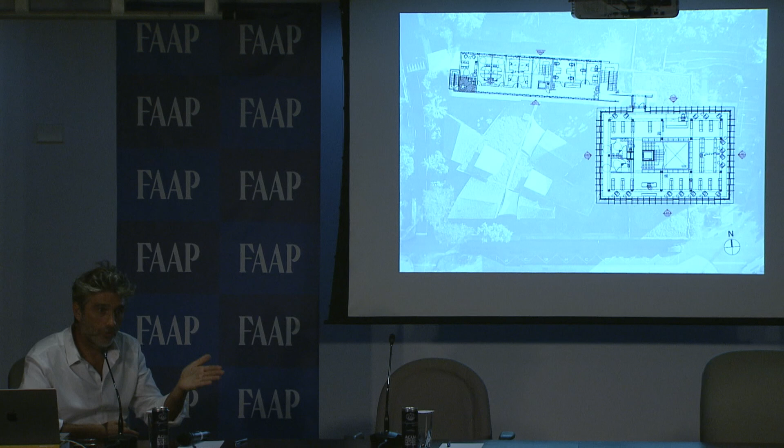So we draw each orientation differently. The brise soleil are different if they are on the east or on the west, on the north and south. And especially, we have a very special plan of the children section, and each red circle is a kind of brise soleil.

So that's the list of all the kinds of brise soleil we've got, because each time we have to balance between solar protection and natural sunlight. So we have to make a special one for each orientation. That's maybe a crazy job, but very interesting, because that was like a catalog after for me.

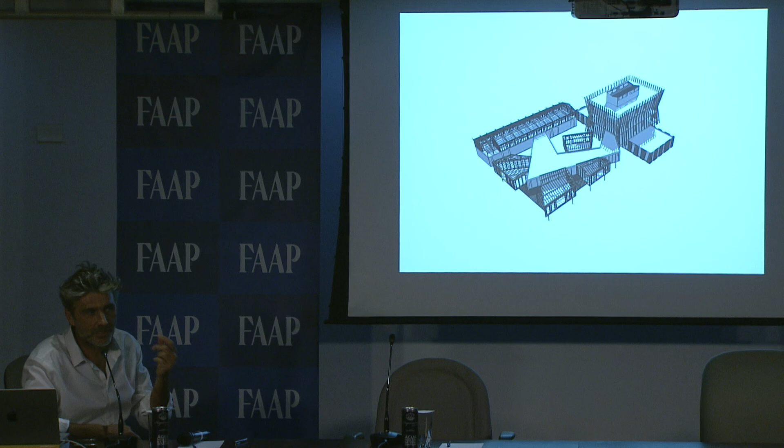Of course, the municipality wanted wood, so we made a base in concrete, and of course we made wood, but taking it away from the soil. It was a way to convince them, because in our tropical area we need some facades without inertia. We try not to have inertia. It's like a reverse way of thinking from what they do in Europe, for example.

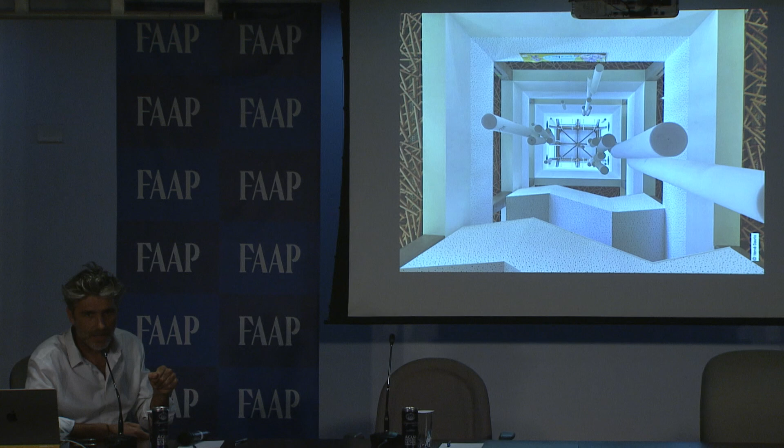So we did it in wood, and after, the big point was the cross ventilation. For narrow buildings, it's easy, it goes, but for bigger buildings, it's more difficult. So we made a negative depression chimney to take the air away, and that's a part of the drawing. I think this system of cross ventilation to extract it is really something very important to draw my and our buildings.

And as Martin told me the other day, French are never happy. And so I said, okay, let's see what's wrong in this building. So I found many things. I won't tell you everything, but I think there was a point about materials. We're living on an island, and it's not so easy to have everything, to have local materials. So I realized that using wood was not enough to be sustainable, and also that making tropical bioclimatic projects was not enough to make a complete architecture.

So I went on, and I had a chance to have another project. It was the headquarters of the Architect Council of Réunion and Mayotte in Saint-Denis. Don't be afraid, it's not the project. That's before the project. They bought a small house like that, and they made a small competition with some architects to make the headquarters.

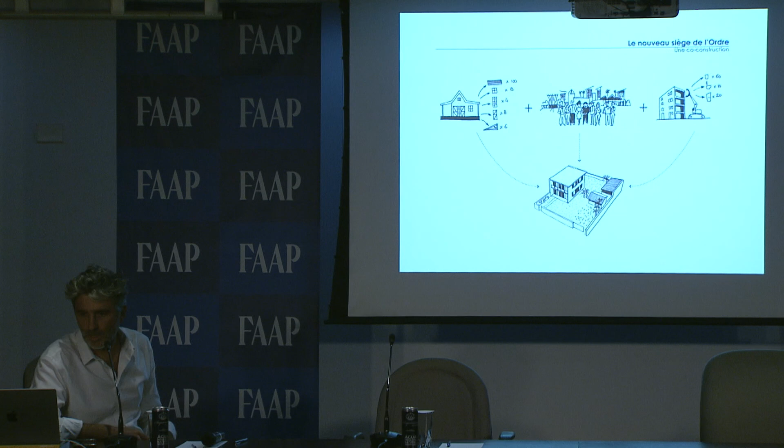And also, there was something very special because it was for the Architect Council. So we had a network, and it was something we could do together, and it could show what we can do in our world. So putting that all together, I said, okay, why don't we reuse materials to build this building? And we presented some plans with all we do.

I always tell you that I start with the landscape, with the soil, what happens. That's like a basis. Because something changed. I decided after the media library to put bioclimatic things at the beginning of each project. It was not just an objective to reach. It was like a basis, like gravity, something we have to start with. And after, we can add all the complexity and the richness of architecture and our cultural environment.

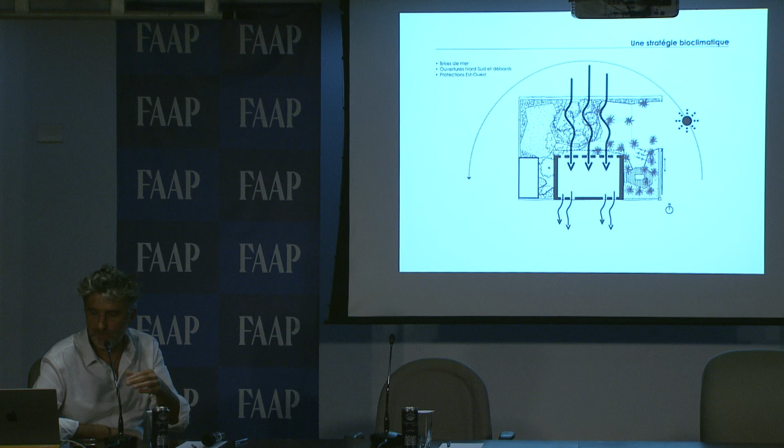So we did this landscape. We put some plans. Of course, we had a bioclimatic strategy. That was obvious. It was pretty easy here. And after, I told them the project can be that or that. I don't know. We'll see what we'll find.

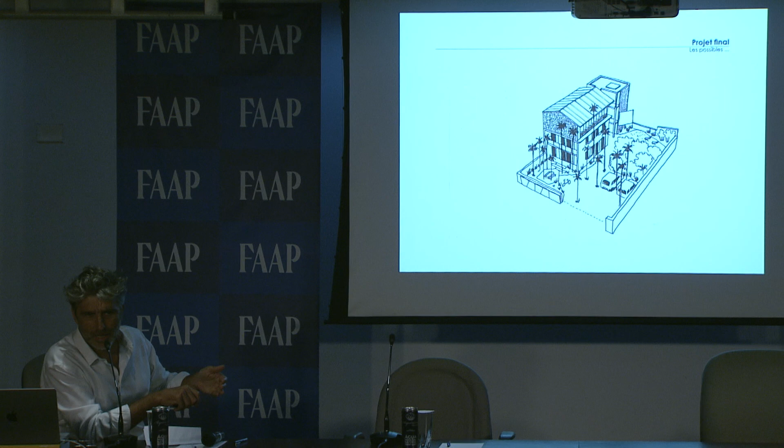And they had a big debate inside, because some of the people said, okay, it's wonderful, we have to prove things. And other people said, you're crazy, we will sign with him, but we don't know what the building will look like. And some people said, okay, it's a council of architects, we have a strong image, and how will you do with that?

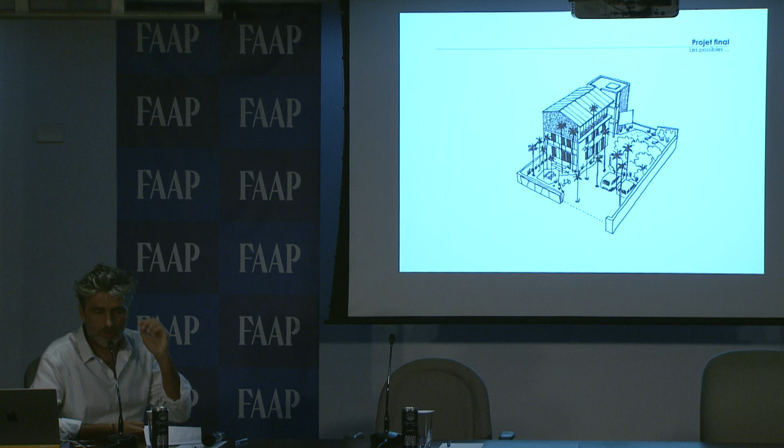So finally we won. And we started to look for some materials, a field. That's the most important when you reuse things. So we spent nearly 1 year.

We asked all the architects: if you have got some things in your works, if you destroy a project, call us. So someone was calling: okay, I've got two windows there. Okay, send me a picture. We spent nearly one year going all over the island. It seems small, but sometimes it takes us 3 or 4 hours to go from one side to the other. So it's not so easy.

For example, we took the windows of a kind of hotel at the volcano. We took them, and afterwards we put them in the facade. So we changed our mindset completely. We don't design and then find material; we've got the material, and then we design with the material. So the lines and the drawing of this facade are done by the materials we've found.

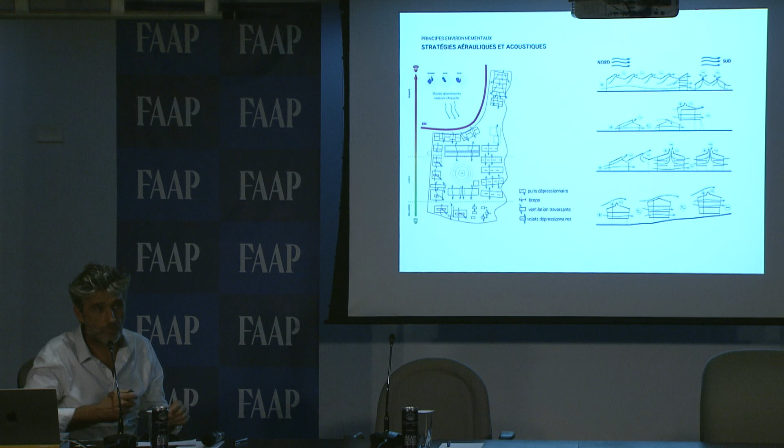So we have to think not only about the cross ventilation of each building, we also have to think of it at a large scale. If you make a building which blocks the wind behind it, it doesn't work. So we have to think about all that, and every program makes a different drawing, because this is a place that we call it an écope, or that's for the classroom with an umbrella roof, different,

and we tried it in what we say in French a soufflerie. It's a wind tunnel. We made this huge model to test, and there are a lot of sensors inside, so we improve it. The model is 4 meters by 2 meters, and we can see if there is wind in each room, and we can also see the movement of the wind to improve it and to change it. That's the Laboratoire Eiffel. We did that in Paris.

So that's this project. It's 20,000 meters, but a lot of wood. Don't worry. It's also talking about earth, and that's the pathway, the walkway around with the existing chimney. But this project is also human, and the most important thing I will speak about in this lecture is more a human adventure.

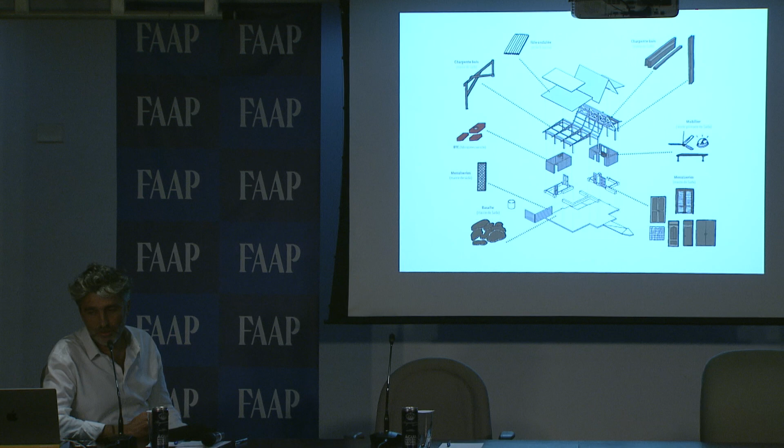And we started the works there, always with students or children coming, because it's an existing high school. So it was a support, we can say, because the students came here to work, to see how we really build it, and they helped us to make the building. And we mixed it with CEB, because that was one of the topics. So the two architects who were there stayed working on CEB, and after they made many things.

The aim was to communicate about this project also, because very often the project is completely abstract, and suddenly you open the present, and there is a high school, there is an airport, it's completely finished. We wanted to change that also in the process, in the way of thinking and sharing the project.

So the first thing we did, of course, is a big model, because that's a very important point to communicate a wood project. I think the model is a perfect way to communicate it, because everybody loves models, and it's very easy. So we made a big model, and as it was an existing high school, we asked them to buy some CEB presses, and we taught the teachers how to do that. It's very strange, because we were not architects. We were like teachers. Our aim was to have a positive attitude on the territory.

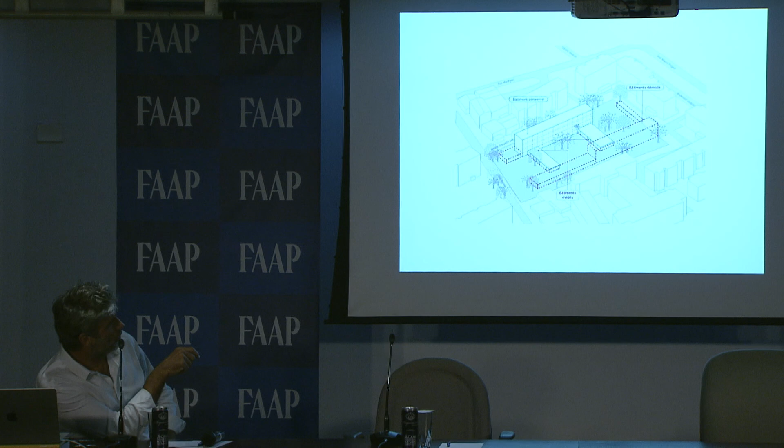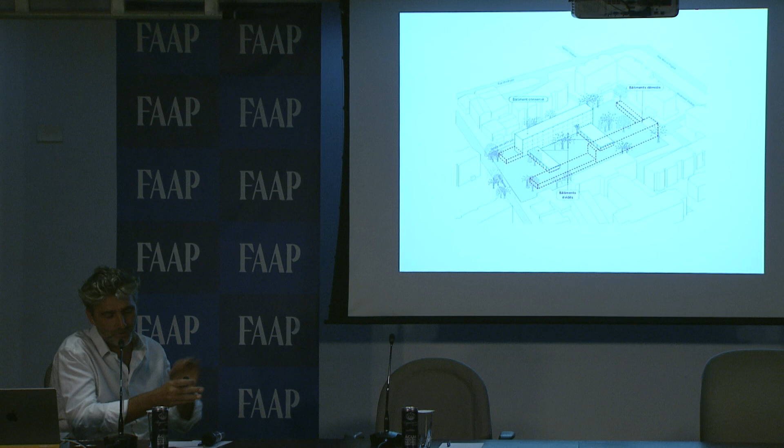So we said we will destroy all the red ones, but we kept just this one. This one and this one are not very interesting. There's nothing. But here, we said we were destroying it because there was some problem of wind. But you'll see, we built the new building exactly in the same way. So it was just a strategic way, not to say that we are keeping everything. We will come back to keeping them. So that was the first point.

We had to change the image because there were really reasons. We wanted to understand why they wanted to destroy it. There were political reasons because they had to show something happens there. So we wanted to make a horizontal and vertical fragmentation, to change the edge of this building also. And after, the main thing we did was we planted a forest.

Because it was a very strange project. Usually there is not enough space; here we had too much space. I wanted to go very fast, but there is a system: there is a public space, and the school is taking all the site when it's open, and when it's closed, it becomes public space. So there is a kind of mutualization of the spaces.

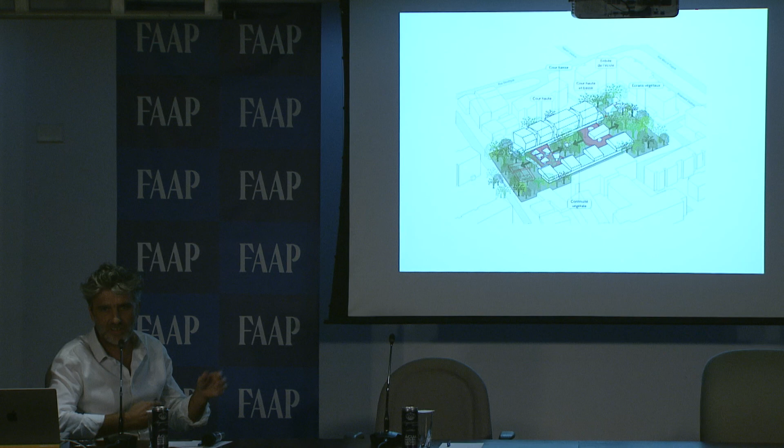But the main thing is to start a project not speaking about architecture, but speaking about landscape. And as we had a lot of space, we started to ask what will happen in our landscape. It's not only putting some trees. How can we live outside? What will the children do? So we started to say, okay, here this will happen, there that will happen, and like that you could design outside.

With it, we were not speaking about hard architecture, but it's very important, especially in our tropical places. Again, it was a way to say what's happening. These small sketches just mean that there is a huge attention about that. And after, we translate it into architecture, but it comes after.

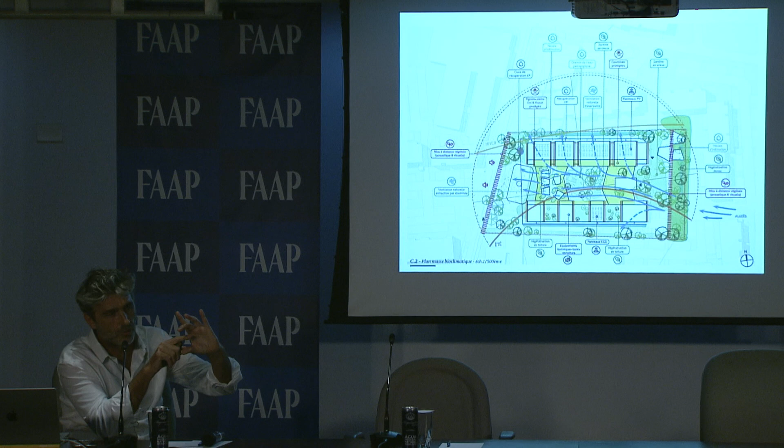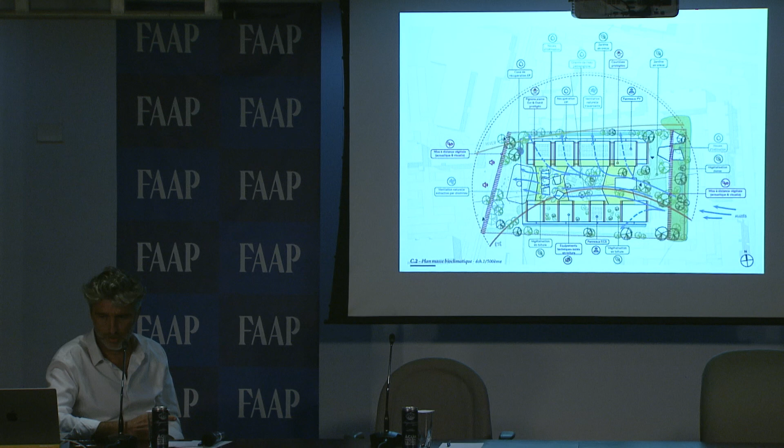Of course, it's a sustainable project, and there is very important technical work to make cross ventilation, because it was not so easy, because the wind was coming here. It's much easier when you've got a new project, of course. But we took the strategy of a U. You make a pressure: the wind is coming on that side, there is a positive pressure here and a negative pressure around, so it creates wind into the classroom especially.

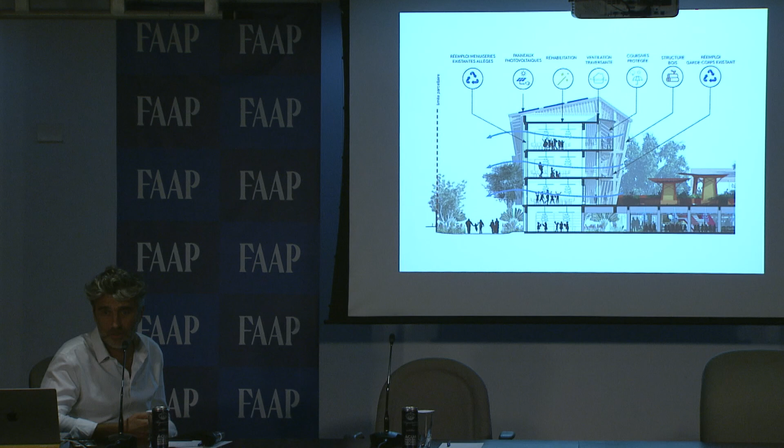We also see cross ventilation. I was speaking to you about it, and here it was more difficult, so we made some chimneys to help in the restaurant area. I think we spoke a lot about it during the workshop. Using wood, adding it to other materials, is very important also. We have to think about it because it's very light and it can help. It also helps to protect, to give more insulation, because all the question of this project is solar protection, wind, and landscaping.

And we were very lucky, because keeping the original structure allowed us to have more space. So we could increase the spaces of the classroom by doing this varangue. A varangue is these rooms which are not inside and not outside either, but protected from the sun. So I hope the children will be as happy as in Japan.

And I want to finish with something else. I will present you something special. It's a project we haven't done yet. We're just starting to draw it, the first sketches, but it's about a story that happened in Mayotte on December 14th. A big cyclone happened there. December 14th was a Saturday, at 10 o'clock. A cyclone arrived, and it was really a very important one.

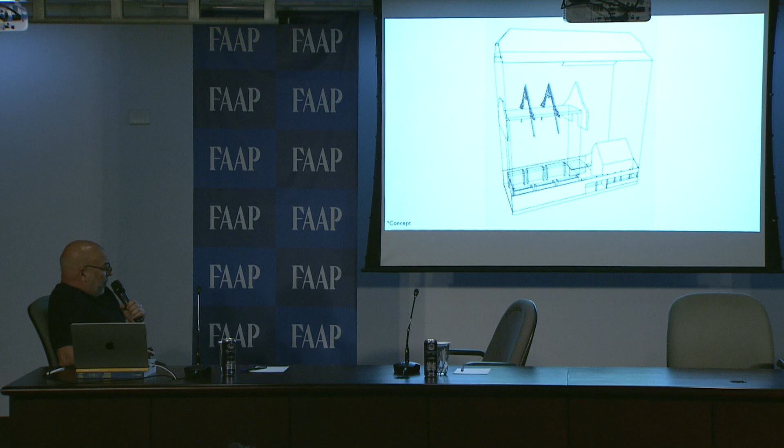And just to show you one of our early works that deals a lot with tradition, with the craftsman tradition in Vorarlberg, but in a very contemporary way. This is a small museum in an old, 400-year-old farmhouse in a typical village in the mountains, a listed building where there was a little museum up front, and we were hired to do a museum for Baroque painters from the 17th and the early 18th century, and we did this. We inserted a house in the barn, and our goal was to hide this more or less. So that's the building, very typical, one of the nicest examples there. And when the museum is closed, you don't see anything about the operation. When it opens up in the morning, it becomes clear that this is a new place.

It's done in silver fir. We have heard in the last days that you have hundreds of times more species than we have. This is one of our most precious, the silver fir. Wonderful quality of timber. Unfortunately, it's more or less gone in our area now. That's also something that we are not very proud of, that we were part of exploiting this kind of timber, and it will take a long time to recover. And right now there are just parts in the Black Forest in Germany where that kind of timber grows in larger amounts.

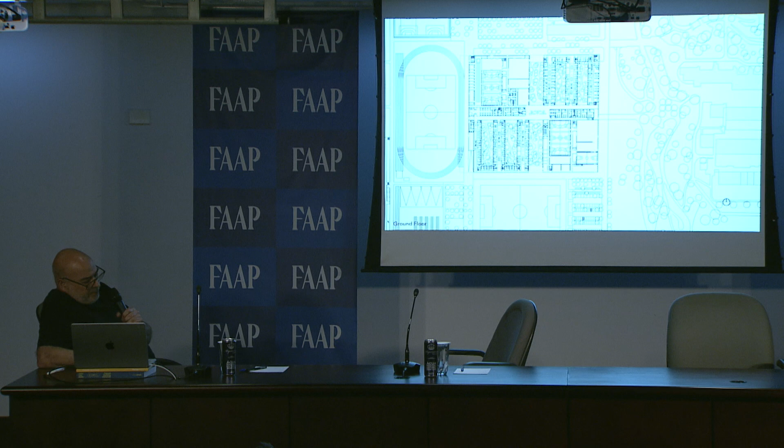You see here the gym halls, the institutes. To the left we have the restaurant and the library. Six courtyards in between. You arrive at the upper level, and down here on the lower level there are all the dressing rooms, stuff like that, and 20 hectares of outdoor sport facilities.

And one of our images was that, blue, yellow, red. It shows the different parts. So blue are the sports halls, red is the big canopy that you might have seen in the model. And yellow is the so-called rue intérieure, so the main gathering spot, a large distribution zone for students, which is dedicated for every purpose. So it's not just walking around without any furniture, but it's a full event room.

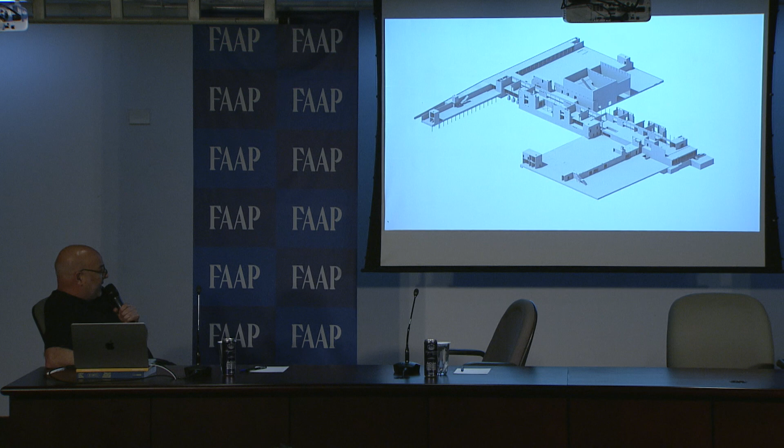Also in an almost full timber building, you have a lot of concrete elements. Here we had the problem that this dimension, 200 by 160, is for the horizontal forces, for such a low building, quite a challenge. So we decided, together with Konrad Merz, the structural engineer, that we do this rue intérieure mainly in concrete, the auditoriums, and of course all the vertical staircases, and the rest then in timber.

The most important element is that canopy. In the competition, a canopy with 28 meter span. We had to reduce that later to 20, but not out of structural reasons, just the budget was not big enough to allow these 28 meter spans. So these are elements 32 meters long, 4.50 meters wide and 2 meters high. They sit, to the left, on these two pressure steel columns, and are held back with these 7 centimeter tension poles.

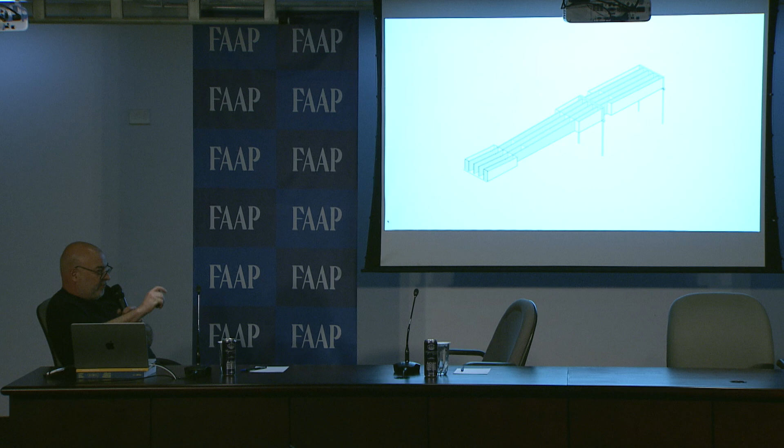So a little bit the opposite of the '72 Olympic structures. Here the element itself appears quite strong, but it sits on almost nothing, and just the weight of the ground floor holds it back. So these are the craftsmen within one of these elements, fixing it in Austria at the enterprise, then brought it.

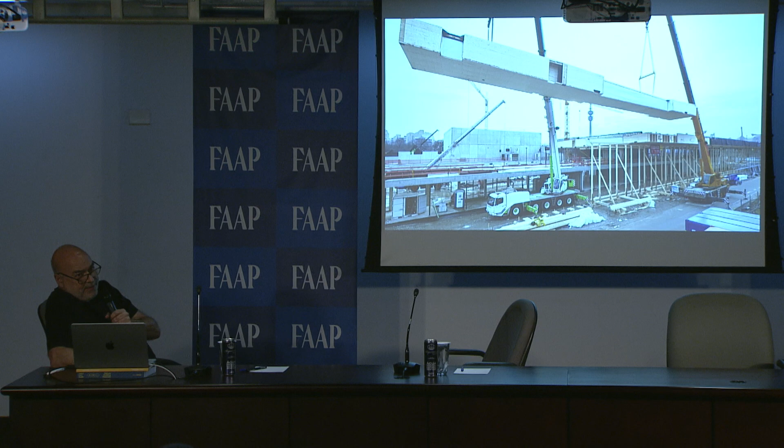That was a transportation, 24 elements, about the size of half of a windmill wing, and they put these into place within, I think, 3.5 days. 4,000 square meters of prefabricated elements with 2 large mobile cranes. You see here the tension poles and the pressure poles, so really more or less nothing.

And then there was a supporting structure for 3 months that you might have seen before here, and that was the first moment that I saw even Konrad Merz, the structural engineer, a little bit nervous before they pulled out the structure, but it did exactly what he intended. It came down 2 centimeters, and it still rests. That's the advantage in timber, that it doesn't have such a big long-term, I don't get the word now, but if this were a concrete canopy, over time it would come down a little bit.

The purpose for this is, on one side it was a sign for this important building, but we also wanted to create, like in Formula One, a pit street, because a lot of Olympic champions train there, and below the terrace are laboratories, and they put their equipment out and do exercises on all the sports people outside. So it's very convenient because they don't get wet because of that roof. It's a very important part actually in the ongoing processes.

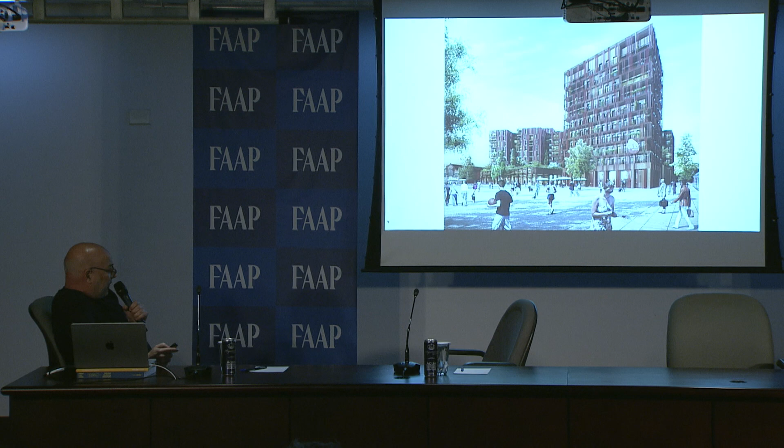First we wanted to do the hotel in 3D modules, but they didn't have the ability. It was a carpenter from the Pyrenees, and they couldn't produce these room elements, so we decided at the end to do the whole operation in 2D prefabricated timber elements. So that's it now. So that massive base for the commercials, and on top the up to 11-story high building. The little park on the supermarket.

We have chosen different reds because Toulouse is known as the Rose City because most of the buildings are done in brick. These are terracotta facade elements. So it's almost itself a little quartier. And terracotta poles for the tower.

And then a very important project that maybe works quite well with the topic of the systems. The renovation and extension of a lycée close to Paris for more than 2,000 students. A typical school building from the 70s like that. There are in Paris, I think 700 or 800 and a few thousand in the whole country. Quite poor architecture, very bad energy performance, mostly done in concrete with just maybe 3 centimeters of insulation.

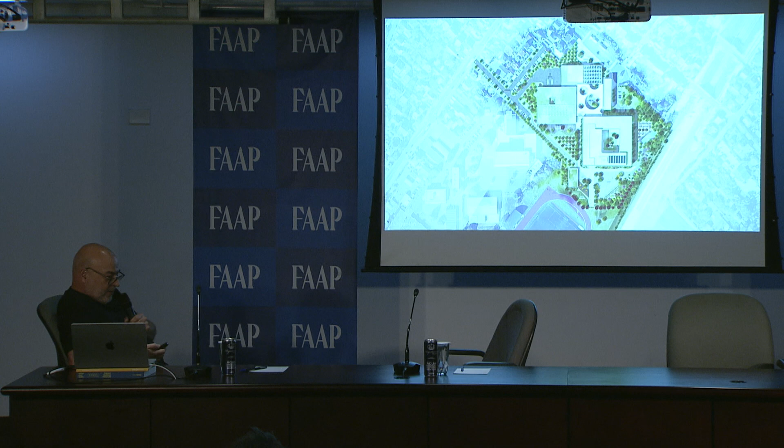And then we decided also that this part of the existing school building was 5-story, but the new rules didn't allow a 5th floor anymore. So we wanted to keep this, whereas we also wanted to create a central courtyard space, which I show shortly after. The big goal was how to do that without ever having some of the students moved out. So under full function, within 6 phases, we developed a system so that we could avoid temporary buildings, which would have cost millions for nothing.

And because we left everything there and just added these timber structures, which are very simple, almost each phase just runs for the summer holidays, and this enabled us to have completely no temporary buildings. These were images from the competition, the new entrance building, the new central exterior courtyard, the new main entrance in the back, the extension of the restaurant as a timber structure. All of that ongoing. In the back you see the city of Paris, the Eiffel Tower.

If you look quite closely, you see here to the left that wing that closes the school building, the extension of the restaurant in the foreground. Very simple structure. Unfortunately, the client, after we had a battle for years for the budget and were completely in the budget, then decided they wanted to go for a general contractor, and the next day we had 30% more costs for, I would say, not very realistic security in planning and in budget, because these companies try from the first day to make more money out of their contract.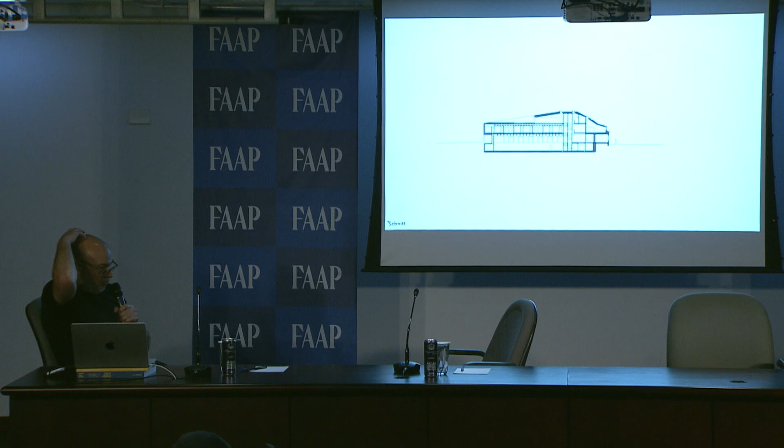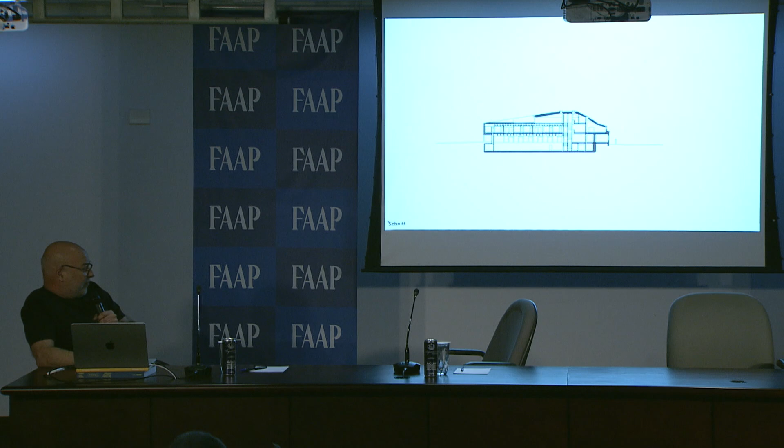We've taken from the excavation of the sports halls the earth, produced prefabricated elements for the walls that we fixed on these grass mats. That's when we mounted them, and after that we plastered them with earth 3 more centimeters, and that's a perfect solution for the air conditions in the building, because it takes a lot and gives back a lot of humidity. So from above, you see that big head.

The whole glass body is shown as part of the roof. This is one of the hallways with the windows, which also works as outdoor teaching. At the end, you can go down to the courtyard. This is this series of connections between the classrooms.

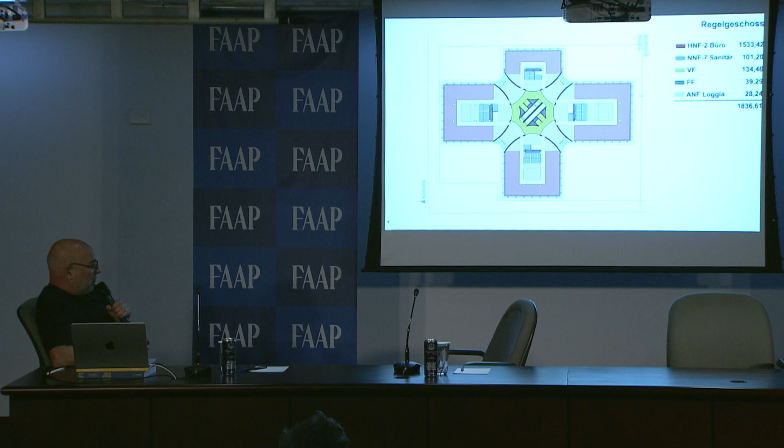We are in challenging times where I think the numbers we are used to taking into account for new timber buildings, or even for buildings, will change into a complete CO2 measurement. And these office houses we do for the owners of Lego, the toy company, who want to have the Danish numbers; they have a limit of 8 kilograms CO2 per square meter. They wanted to do their Danish numbers here in Switzerland. And so we designed at a very early stage, so that the complete project, even before we gave it to the authorities, was completely detailed.

This central part is in concrete, and the office wings are 100% timber. And we found out some very interesting things about the CO2 footprint, because we checked different kinds of structural elements, how many kilos they use. So for example, a hybrid system and a 100% timber structure just have about half a kilo difference, and a 100% concrete structure has about a kilo 20 difference. So if you take into account that in total it's 8 kilos, you see that you have completely other problems too that you have to take care of, not just the main structural material.

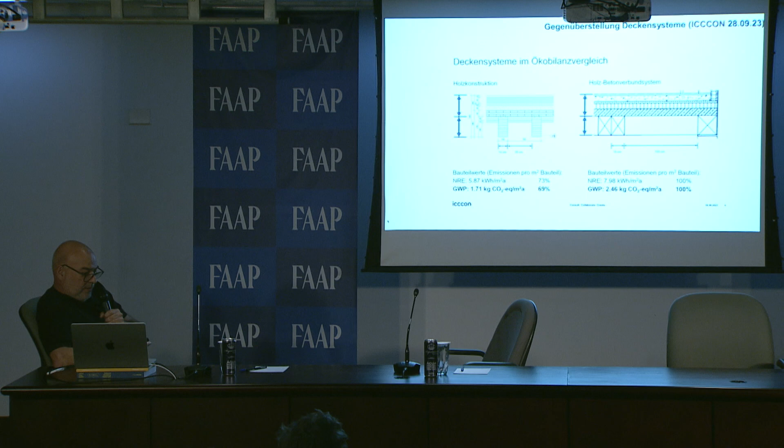So we did all these lists. What are the advantages, disadvantages? And the result was we do it like this now, 100% timber here. That concrete, I always call it the concrete floor, which is not that bad, because here we said we just do the concrete floors. There's no additional layer. And compared to the timber floors with a lot of additional layers, the footprint is not much worse, actually. So this is under construction now.

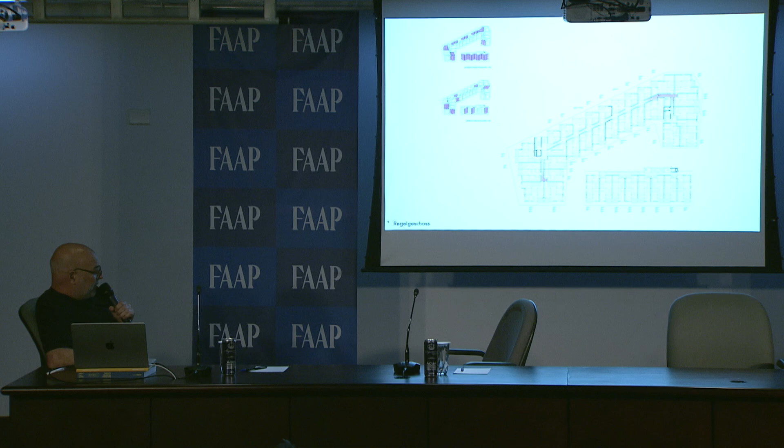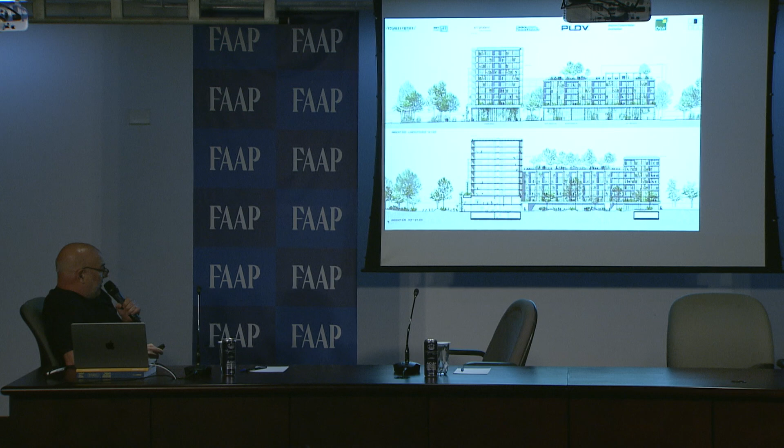And just to finish, some social housing. We do a lot of social housing, also in timber. So this one with an 11-story tower. Here we have the strategy that we do the floors in very thin concrete prefabricated elements, 3 by 3 meters. Then we have thick timber columns and a timber facade. This is price-wise actually very good, because of course for social housing the price is a topic. Even that quite differentiated, complicated geometry works. That's the model 1-to-1.

A mobile kindergarten that is completely done in prefabricated 3D modules. You erect it within 2 days. You could take it apart any day and put it up somewhere else. 3 elements is always 1 classroom. So a very cheap and practical solution for temporary buildings, whereas mostly they last forever. Nobody takes them away. So everything is already installed, all the pipes and everything.

And then just quickly I pull through a housing system with 12 by 12 big units that can work 2-story up to 4-story, and also in a closed plot within cities. A project where the Secretario yesterday said something about all the waste we put into landfill. Here we use 12,000 pairs of skis that were thrown away as railings for the apartments, because of course there are a lot of products you can reuse or give a new meaning. These skis will never rot, and they are completely weather and waterproof. So why should you throw them away? And these 12,000 pairs you have each year as garbage out of the rental ski market.

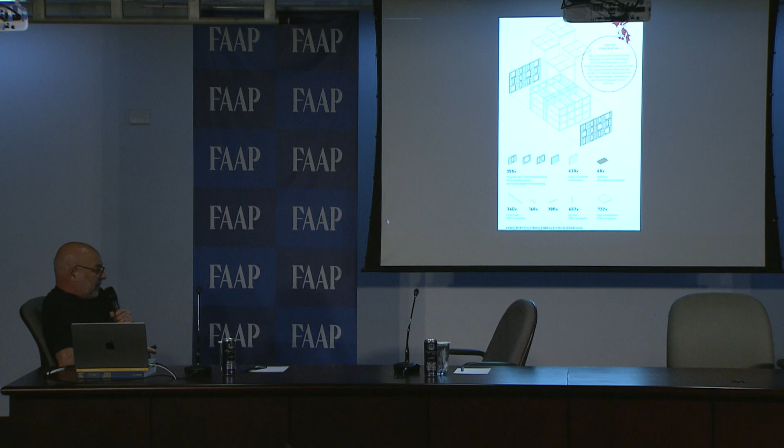Yeah, what's the future of building with timber? It's late, maybe it's too late, but still the forest is growing. It's still there. It's growing. If it goes well, we'll have a lot of timber buildings that educate us and our children, and store a lot of CO2. So maybe we still have a chance, and hopefully stupid assholes like Trump or Bolsonaro or complete dumb megalomaniacs like Musk or Dr. No, to come back to James Bond, will not take everything over. Thank you.

It's going late. You have my presentation loaded? Yeah, but let's see where. Oh, I downloaded it, right? See if it's one of these. What's the name of the presentation? Not this one. It's Núcleo de Madeira, and then my name at the end, I think. You want to copy it again? No, I have it here. PPTX, Núcleo de Madeira. Maybe I put the date first. Yeah, maybe. We do it back now or?

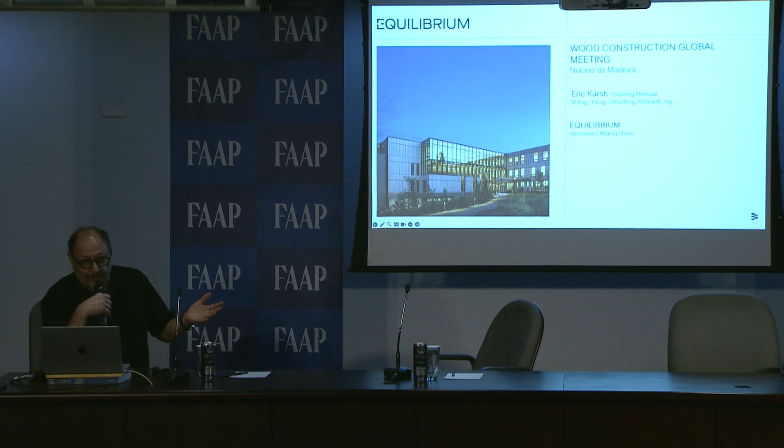So we founded Equilibrium in Vancouver in 1998, and then more recently in Paris and Atlanta about 3 years ago. We are about 25 people in total in 3 offices, so we're a very small firm, I would say, but we do all kinds of projects, and about 90% of them are in wood. But we also design the concrete and the steel that is in our structures ourselves. And for those who come from France, we work both as engineers of record and as specialty engineers, so working for suppliers. And we always prefer to do both on our projects.

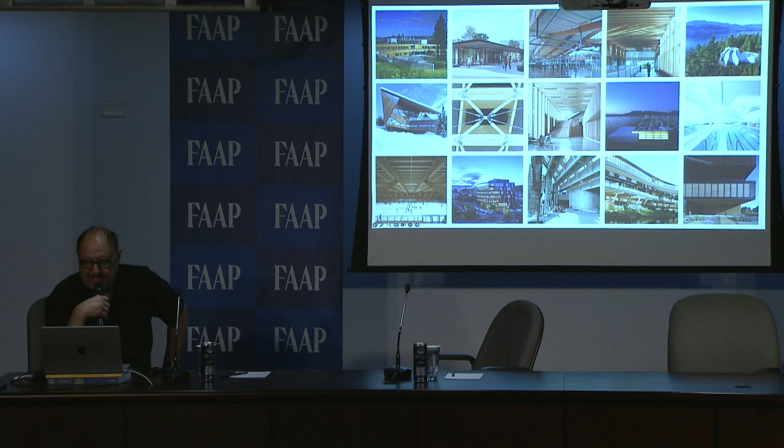So we do First Nations projects, as I said. We've done over 100 of those. We do schools, we do university buildings, airports, small projects like this yoga pavilion on the right-hand side, which I will talk about a little bit, sports facilities, multi-residential, office, and so on.

In 1998, when we started the firm, timber technology in North America was, I would call it, very primitive. It was steel plates, bolts. There were 300 CNC machines in Switzerland at the time, but none in Canada. We got our first CNC machine in Canada in 2001, which completely changed how we design structures because it shifts the economy of labor and materials, because the CNCs, of course, can work very fast and do very, very complex cuts, but also do them very accurately. So this opened the door to using more sophisticated connection systems.

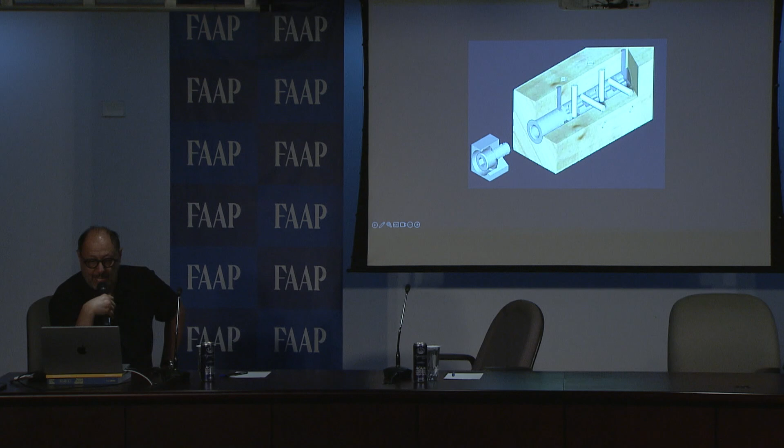CNC technology also allowed us to do very complex structures. This is the Art Gallery of Ontario in Toronto, which was designed by Frank Gehry. And if you look closely at this facade, you will see that the timber elements are at a slightly different angle. They fan from left to right. So every single connection in this structure is geometrically slightly different.

So we used CNC manufacturing to keep the steel connectors the same, but to vary the geometry of the wood, to unify the connection systems as much as possible and bring the project on budget. And I love to show this picture here where people go to an art gallery and look at the structure instead of looking at the artwork.

In 2007, we were invited by a group of Austrian investors who wanted to build the Austria House in Whistler for the Whistler Olympics. And we discovered the passive house concept there, but also CLT, which we didn't know about before that. So we came back very excited about this new construction method and convinced an architect who wanted to build his own custom home to build it in CLT.

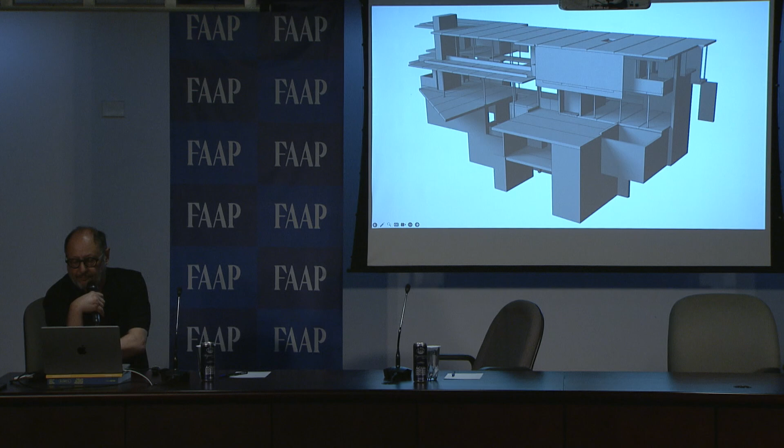It ended up being the first CLT project in North America. We designed it in 2007, but it was built in 2009. And this house actually was delivered from Austria by KLH in containers. And the entire timber structure was built in only 5 days. So there's a view of the house here, and then there's a view of the completed project.

But every project in Canada at that time could not be built with CLT from Austria, so we looked for other panel products to do some other mass timber projects. This is a renovation. It is the North Vancouver Civic Center where I live. So on the left-hand side, you have the original Civic Center. On the right-hand side, the original library. They built a new library, and then they connected the two buildings together to make a larger city hall.

And the connection between the two buildings was a tube that was built from glulam and mass timber panels. These mass timber panels were made of what we call timber strand. So it's a little bit like OSB, but it's very thick, 9 centimeters thick, and it's made of panels that are 8 feet by 64 feet long.

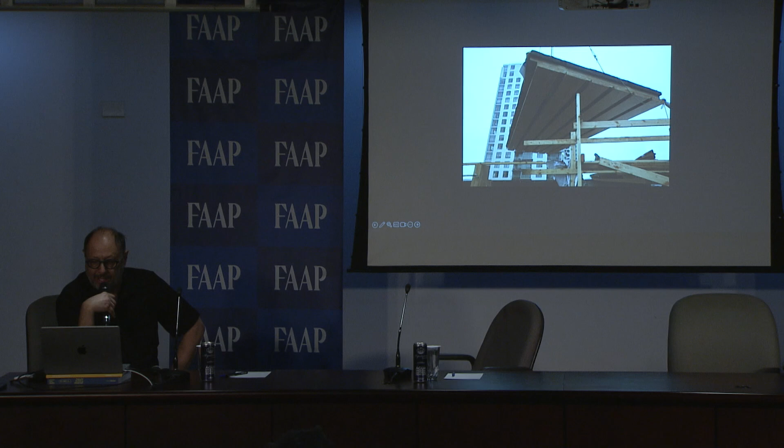So we have 4 layers of this material, basically building a custom-made hollow CLT panel, which was prefabricated in the factory, connected together with screws, and then shipped to site in 12-foot wide by 32-foot long panels. So, roughly 4 meters by 10-meter panels. Now this material is quite industrial looking, but when you sand it and you build it at a very large scale, it actually has a very nice appearance, a very nice texture.

And you see here that connecting central space from the inside with the glulam columns and the prefabricated panel on the roof. The architect, Michael Green, also used the same material, but in a much thinner format as a ceiling in the original concrete building, in the original library.

And the black timber that you see here on the guardrail was actually made from a tree that was in the central space that we had to remove to build the connector. So the wood was all milled and used in the finishing of the guardrail.

This project, you may have seen, was a very pivotal project for us from a technology development point of view. This is in 2009. We're at a time where the BC government was investing significantly to help develop the use of timber in the country. And this university project, the Earth Sciences, was chosen as a demonstration project to show that timber technology had become a high-tech technology and that timber could be used in almost any project.

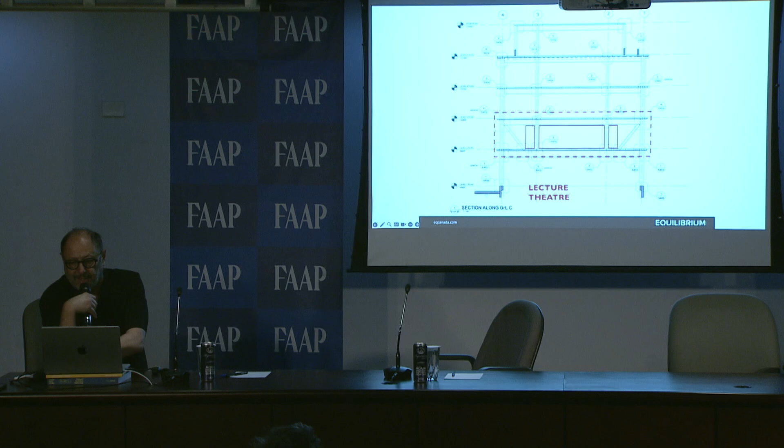So the solution was to use a steel concrete composite bottom chord, mainly because the diagonal doesn't actually meet the column. So to take the shear there, we had to go steel, but the top chord is made up of glulam concrete composite, and then you just have a steel diagonal.

And that 21-meter truss, when the scaffolding was removed, only moved 10 millimeters or 1 centimeter. We like to keep our connection details simple. You can imagine this is a very, very high load that is coming out of this diagonal, but timber is very, very strong in compression parallel to grain. So you bring the load from the diagonal directly into the end grain of the column and the top chord to achieve a very efficient connection.

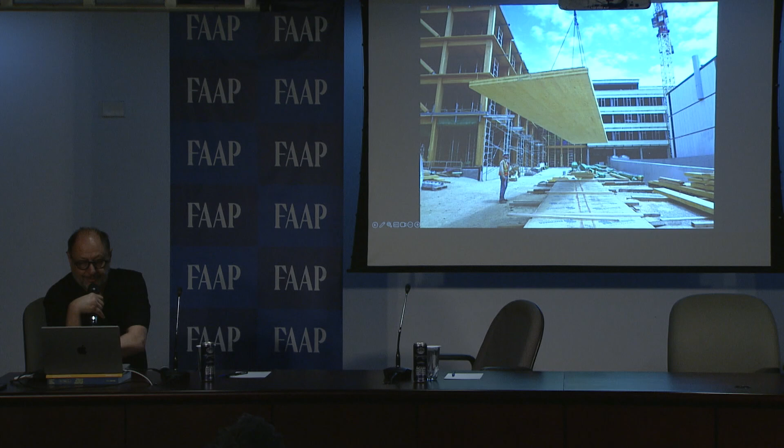The CLT was produced just in time to deliver the roof panels. So what you see here are the first CLT panels produced in Canada, I think. There were a handful of panels that were produced before that for testing, but these are the first commercially sold panels, which we chose to cover with a membrane in this case because we get a lot of rain in Vancouver. And there were other innovative elements in this project. This is the canopy, which was also built out of CLT.

But the most innovative or technologically challenging element in the project was what we call the flying stair. It's a cantilevered stair, which is only attached to the floors. It is not suspended from the roof. It is not connected to the side column there. It's completely cantilevered. It's very easy to do in steel and concrete, but as far as I know, had never been done in wood. So again, we worked with a European connection system called the HSK system. It's essentially a perforated steel plate which is glued into the wood, creating a very rigid connection.

You see here the landing of the stair, which was glued into the wood panel in the shop and is being flown into place to be connected with the stair runs. And then you see the holes here where the glue is going to be injected on site to complete the connection. So there's a view of our completed structure.

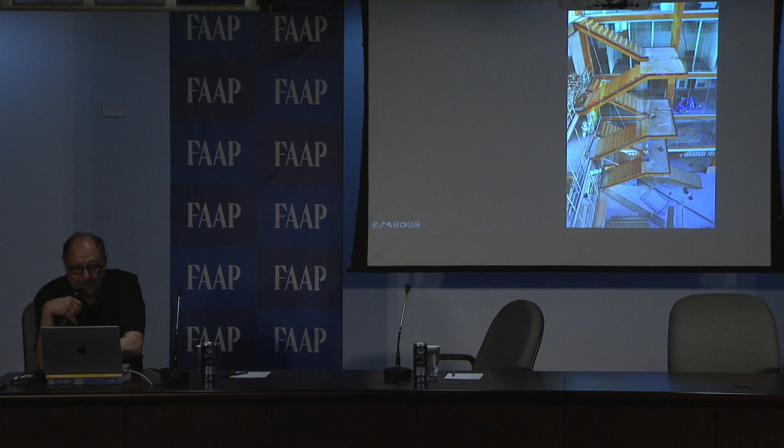5 stories tall. I honestly didn't think that people would use this stair. I thought they would be scared to use it. But if you stand at the top of the stair looking down at this timber stair, it was quite frankly scary. But I asked some students what they thought of this stair, and none of them seemed to be concerned about it at all. So there's a view of the stair with all the finishes. You see a line of sprinklers, lighting, and of course the glass guardrails and the floor finishes.

So this was one example of a project that was chosen for demonstration and technical innovation, but we did a few of those at the time. So this brought us to the point where we thought we could be looking at building larger or even taller wood buildings. And again, with Michael Green, we got a small grant to do a feasibility study called The Case for Tall Wood, and you might have seen his TED Talk where he talks about the report.

We started with the idea that we would do a concept for a 12-story building, but then Michael went to Japan and he saw the Japanese temple that is about the same height, but almost 1,000 years old. So he came back and he said, well, they did it in Japan 1,000 years ago, so we're just going to have to go taller. Now, this is the architect, right? The architect doesn't mind going taller because the engineer is going to figure it out, and that was my job. We decided to go 20 stories.

So we developed the concept and we analyzed it, and it was actually working quite well. So I told Michael, you know, this is working really, really well. Don't tell anybody, but I think we can go taller. We can go 30 stories. So he goes to a conference in Australia, and he tells a Canadian journalist that we can go 30 stories. And the next day, in the papers, there was an announcement that Michael Green was building a 30-story tower made out of wood. So the report all of a sudden became 30 stories, and it was published that way.

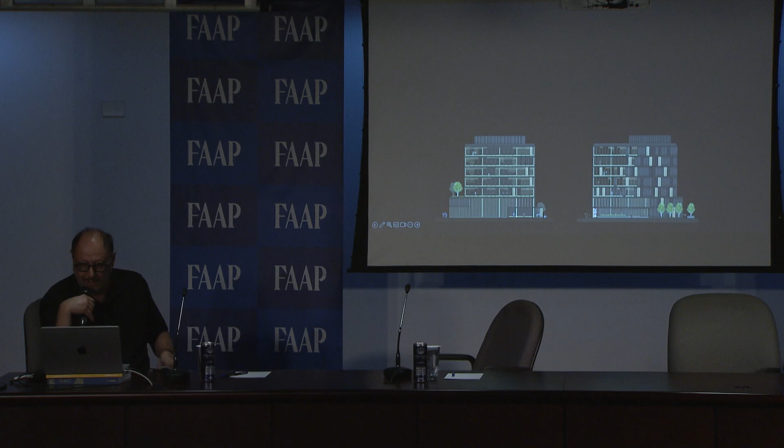And this actually received a site-specific approval because we were completely outside of the Canadian code at the time, both in terms of height, but also because we were exposing absolutely all the wood, including the stair, which you will see later, which is made out of wood. And because we were planning to expose absolutely everything, we needed a pretty sophisticated strategy to hide all the services.

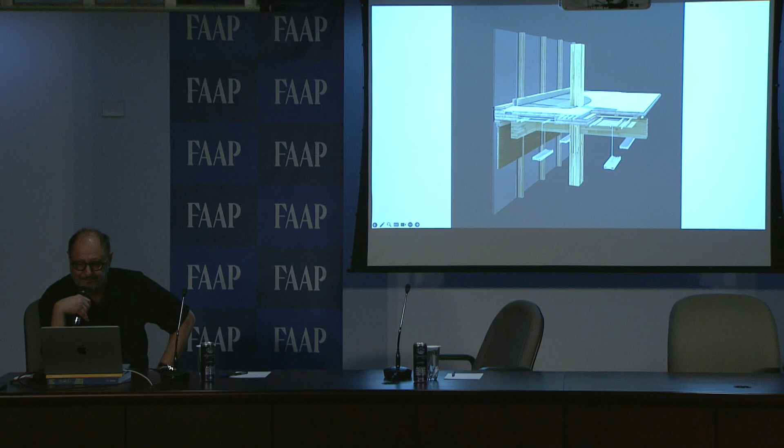So what you see here is a cross-section of a typical floor, which allows us to hide the plumbing underneath and some of the electrical wiring on the top. There's a 3D view of the concept here. And then in the field, essentially it's a 5-ply CLT panel with a 3-ply CLT panel, and they're connected together structurally to create a corrugated floor structure. This was also the first project in North America to be built with a wood core.

And at the time that the building was completed, it was the tallest modern timber building in the world because we didn't have a concrete podium. We started with the wood directly from the ground up, and the building was 30 meters tall. So it was the tallest at the time, aside from the temples in Japan, of course.

So there's a view of the building entrance using different materials from the area, different engineered wood products, CLT, Douglas fir glulam, LVL, and so on. And this is a picture that you probably saw, a little bit of an iconic picture of the top floor before the finishes were installed.

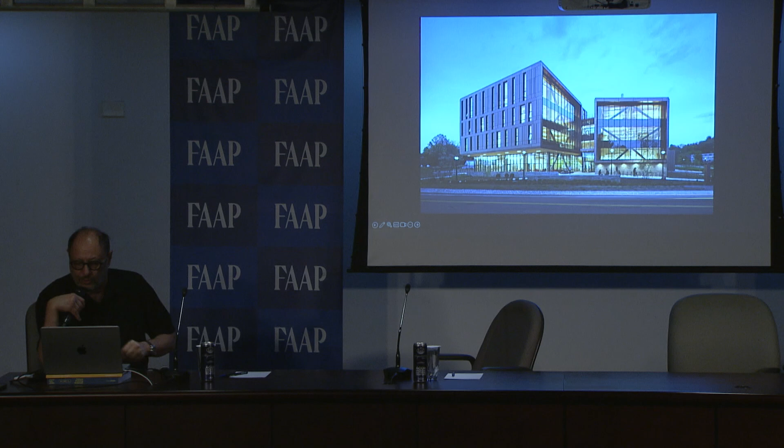So these two projects, the two university projects that I showed, led to other university projects. This one was the first and the largest mass timber project on the eastern coast of New England, of the US. It's in Amherst. It's the University of Massachusetts. And again, we decided to build the entire lateral system out of wood. It's a mixture of CLT shear walls and timber braces.

Now, we're not in a very high seismic zone, unlike the other two projects, but we're in the United States where getting code approvals is a little more difficult. So we had to work quite hard to convince the authorities having jurisdiction in the area to let us build the entire lateral system out of timber.

So there's a view of our bracing system, and the building, which is C-shaped, has a courtyard in the middle. It's an atrium, which has an accessible roof, which is planted, so very heavy soil loads, very heavy snow loads. So you see here the transfer truss, which supports the planted roof, and then a view of that roof structure from the inside mezzanine, which is a hybrid steel and timber 3D truss structure. So you see here some of the connection detailing for that truss.

And a view of the accessible roof with the transfer truss in the background through the windows. And here's a view of one of the laboratories, computer laboratory, I think. This is the integrated design building at UMass.

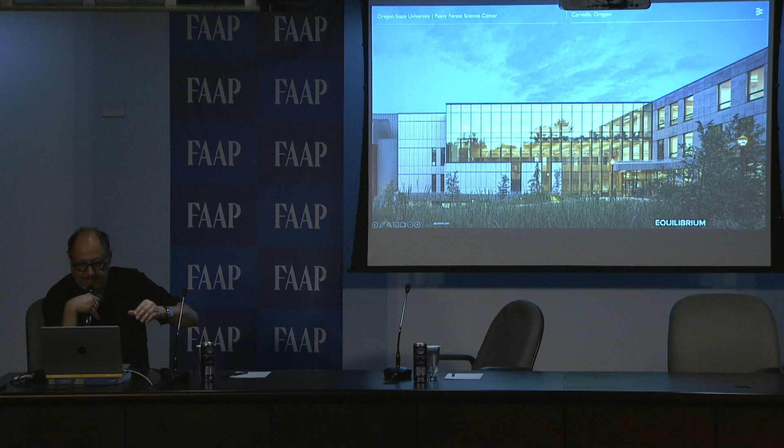That led to another university building, this one in a high seismic zone in Oregon. And there are a number of innovative elements in this one again. So this one, first of all, required much longer spans with a very limited building height. So we had to find a way to go very long distances with a very shallow structure. So we came up with the idea of doing glulam beams with concrete composite, but to turn the beams on the flat. So essentially what we're creating is a very wide wood concrete composite beam going 12 meters and with a depth of only 65 centimeters. And the beam is actually continuous over a double span, which helped us keep it quite shallow.

So the wood concrete composite in this case was achieved using diagonal screws at 30 degrees. What you see here is the situation of the column. So in that zone, the concrete is actually in tension and the beam is carrying negative moments. Over the main atrium, we also have a 10-meter span, but this time we're doing CLT concrete composite with a 24-centimeter CLT panel. So again, a very thin structural system for those kinds of spans. So what you see here are the screws, again, at 30 degrees with an acoustic layer.

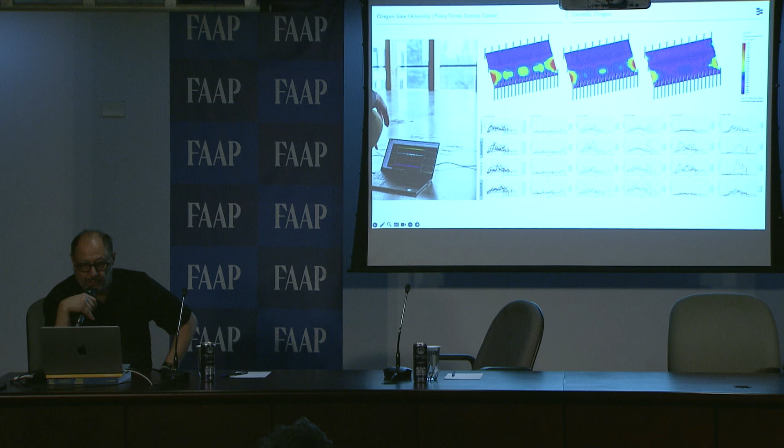And because we were really pushing the limit in terms of span to depth, we did some finite element vibration analysis, and then we had the opportunity to go on site and actually measure the vibration of that floor. And we found that the correlation actually was very good. But the most innovative element in this building is the lateral system. So this is the School of Forestry.

The university was very much interested in demonstrating timber innovation. We're in a very high seismic zone. So we gave them actually three choices. We told them we could do regular CLT shear walls. The problem is that in those days in the United States, the design requirements for standard CLT shear walls were really penalizing. The forces would have been way too high.

We proposed what we call buckling restrained braces, which is a very ductile steel system used in Canada and the US and probably in Europe as well. A very efficient, very ductile system, but steel-based.

And then finally, we gave them a third option, which was a post-tension, self-centering CLT shear wall system, which you see here. So the idea is to run steel rods through the middle of the wall, and then when the wall is installed, to post-tension the rods, so creating a rubber band, basically. So when there's an earthquake and the wall moves back and forth, it always comes back to the middle. This is what we call a low damage system.

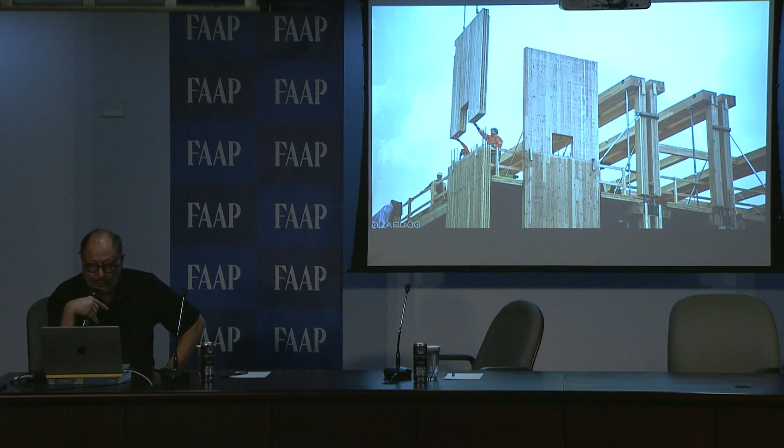So we control the drift really, really well, also by absorbing energy, and I will show you how we do that in the next slide. But also because the walls always come back to the middle, when the earthquake is over, you have a building that is straight and usable. So this is the future of seismic design for resilient buildings. Most of the codes right now don't include that kind of approach, but when you think about ensuring that buildings last a long time, you have to start thinking along those lines.

So here's a situation where you have two walls side by side, and there is an energy absorption connector, a U-shaped steel plate that absorbs energy in an earthquake. And then at the bottom here, you see a single panel wall with the same kind of system at the end.

So here's a view of the finished building, that 10-meter CLT concrete composite floor above the main lobby. And then there's a view of the main lobby with that wood concrete composite floor above. And you will notice that the CLT panels are spaced 15 centimeters to incorporate sprinklers and lighting, which is a strategy that we use a lot.

This is a fun little project. When I was a kid, I used to build model airplanes out of balsa wood. We had a little project for an owner who does aircraft maintenance, and he wanted the building to look a little bit like an airfoil. Now, wooden airplanes were built with very, very thin timber elements, very closely spaced, and then braced together to keep them from buckling, but using very, very thin elements that are all connected together into a strong airfoil.

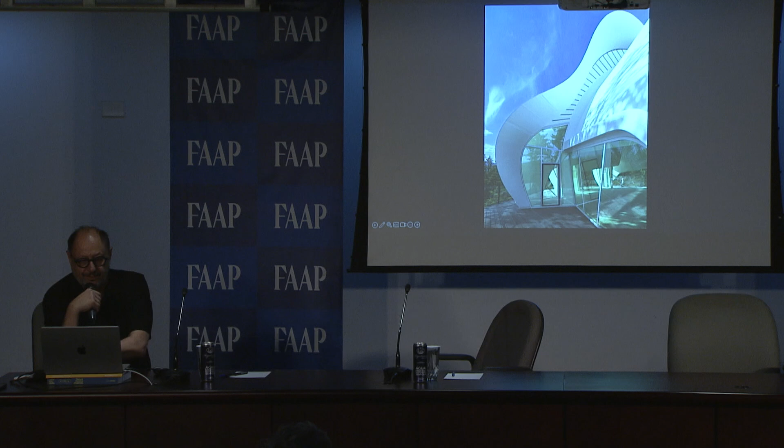So this way, each petal of the temple is built from 4 panels that are built from 4 different templates, as you see here. And then 2 of the 4 panels are connected together in the factory and then shipped to site and supported on glulam arches to achieve the geometry of the yoga temple. So there are some images. The building is actually 4 stories tall. It's not that small. And there's a view of the yoga temple with the ancillary building on the lakeside, again in British Columbia.

Another project that we did in a remote area. This is a small village, quite far north in the province, that had an arena. They had a hockey rink that had roof leaks, and the structure, which was originally built out of wood also, had completely rotted, and we were forced to close the building, which was quite devastating for the village because there's not a lot to do in the middle of winter over there. So losing their hockey rink was a really difficult thing for them, and they were quite angry.

But when they saw the new building a few years later, they were very, very proud of the building and very grateful that we were able to build it out of wood. So this is a glulam arch, truss arch with light frame prefabricated panels. So very simple, very economical structure in an area that actually gets quite a bit of snow.

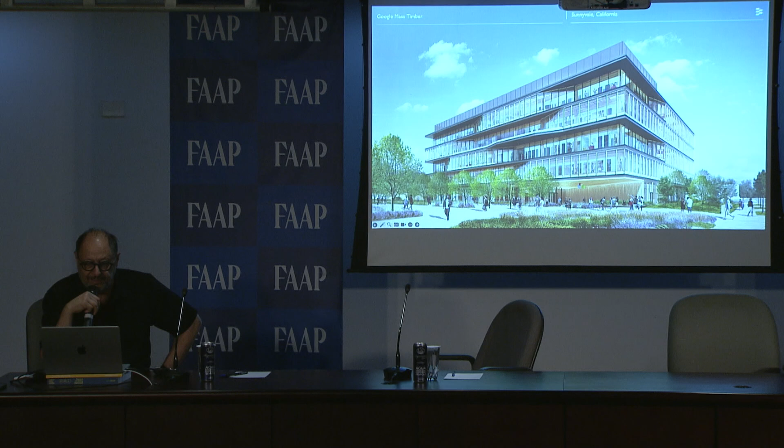So this is a more recent project. The building actually opened about a year ago, officially less than that, 6 months ago. This was the first office building that Google built out of timber. It is a 5-story mass timber structure with about 17,000 square meters. There are 2 major zones in the building.

On the left-hand side, you have all the support spaces, including boardrooms, washrooms, cafeterias, and so on. On the right-hand side, you have the main workspaces. There are roughly 1,000 employees working in this building, so these are large floor spaces. And then an atrium in the middle joining the 2 structures together.

The structure on the left is a very traditional glulam post and beam with CLT panels. The one on the right, because we have a lot more headroom, we were able to do a much more efficient system. So we have, again, the post and beam. We have purlins this time, and then much thinner CLT panels with only about 18 centimeters of timber per square meter. So it's quite efficient for a 10 meter by 10 meter grid.

So there's a view of the building from the outside with the double height space on the right-hand side, the 5-story space on the left-hand side. And here's a view of our typical floor plate. And what you see here is the mass timber floor, which is entirely mass timber for the gravity system.

But for the lateral system, and we're in one of the highest seismic zones in the world here in California, we have, again, a steel structure which is accepted in the code. We wanted to do a combination of steel and wood, as I will show you in a minute, but we just didn't have time to do the testing required to have that approved.

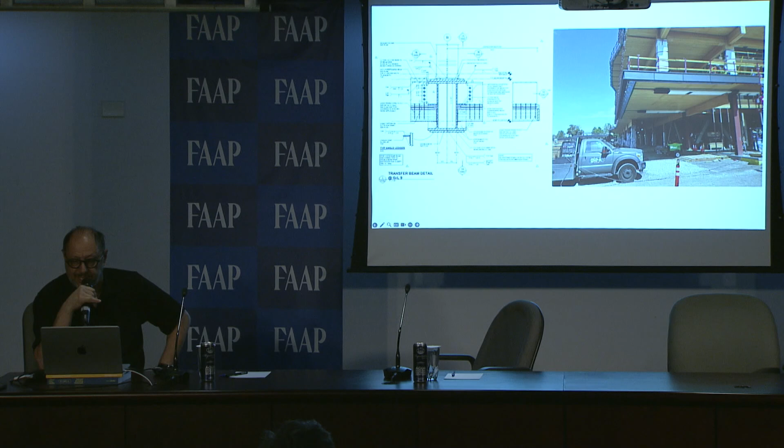The entrance also has a couple of missing columns. So we have 4 stories of structure being supported on a 6-meter cantilever. The total cantilever is 7.6 meters to the edge of the floor. And here's a view of our main entrance with a completed building.

So there's a view, sorry, you can go ahead. I'll give you the images later.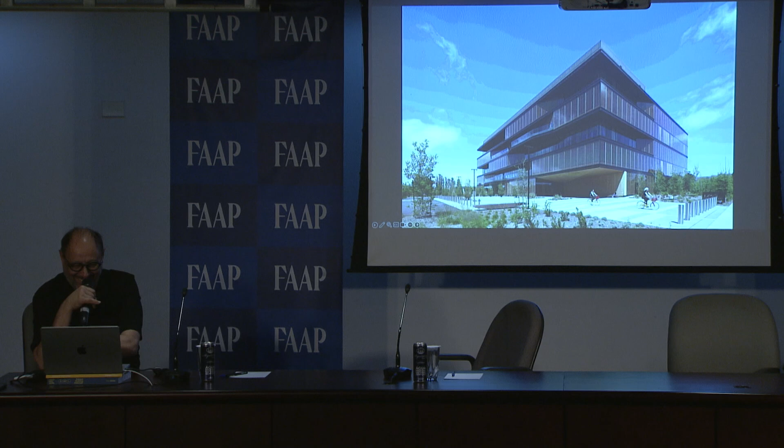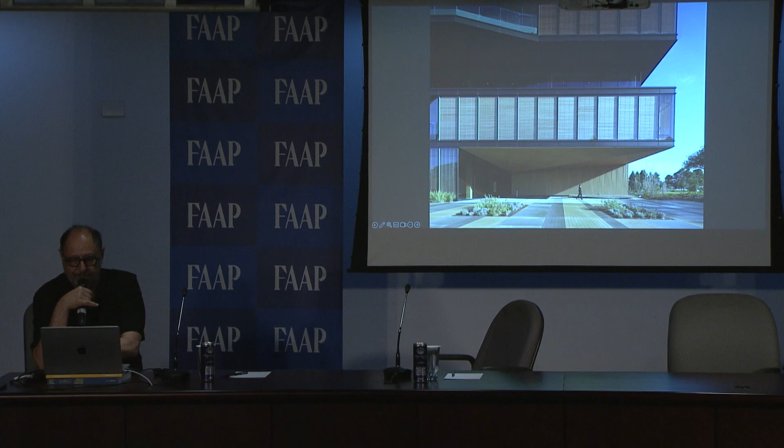Now, I've shown a lot of relatively complex buildings. I think we have shown by now that we can build almost anything with the timber technologies that we have. So the next step is really to try to scale the use of wood up so that we use a lot more wood and replace a lot of the concrete that we currently use. So every building cannot be a demonstration building, of course. We have to develop structural strategies and systems that are very cost-effective, fast to install, and resilient and reusable.

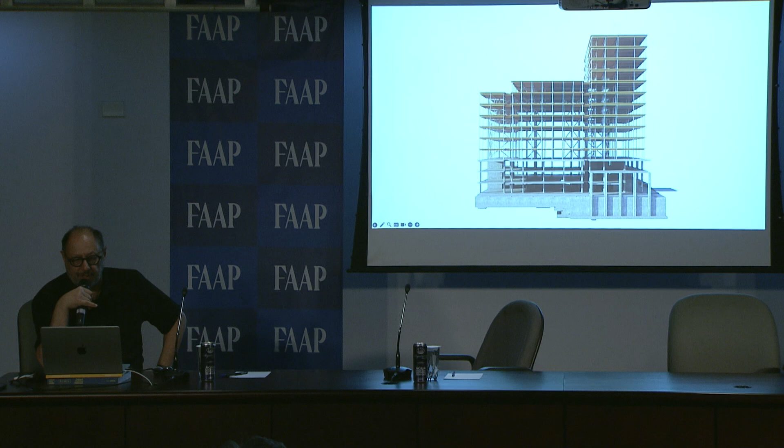This one is a 14-story structure, 11 stories of timber on top of 3 stories of concrete. It's a multi-residential project in Madison, Wisconsin, which you see here. And the approach that we took here was, on the basis that most of the timber volume is in the floor deck, we decided to do a very thin steel post and beam, which is going to be completely hidden inside the walls, and then to expose the timber as much as possible.

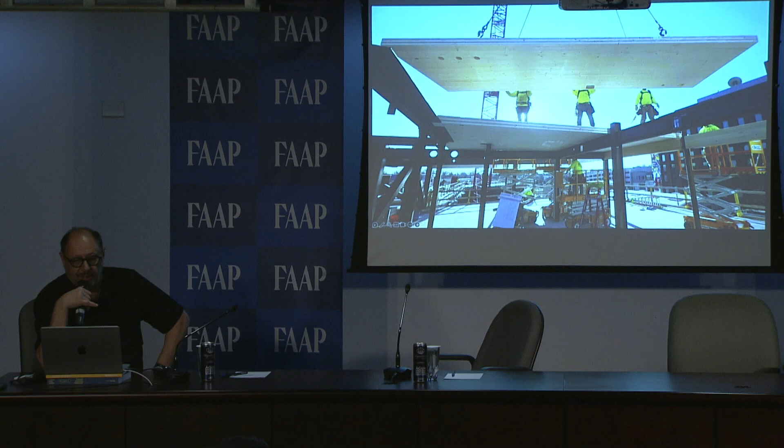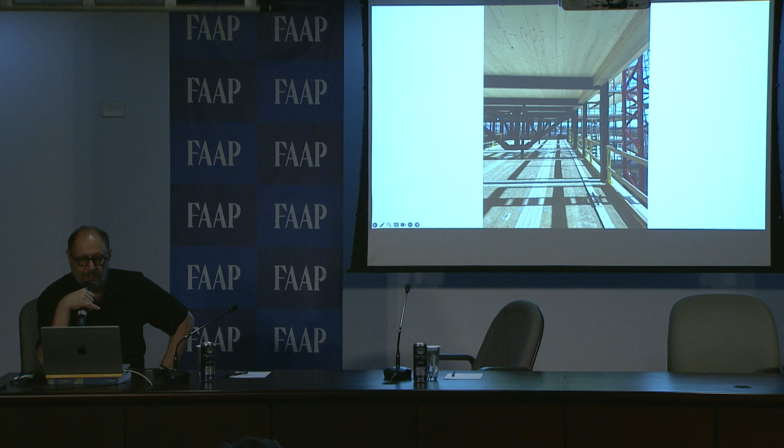So about 80% of the structure is in the CLT, 20% is in the post and beam. And so this way we reach the compromise with the cost, but also with fire regulations where the authorities were more concerned about the fireproofing of the columns than they were about the fireproofing of the floors. So there's a view of the building during construction, and then a view as the structure is getting completed.

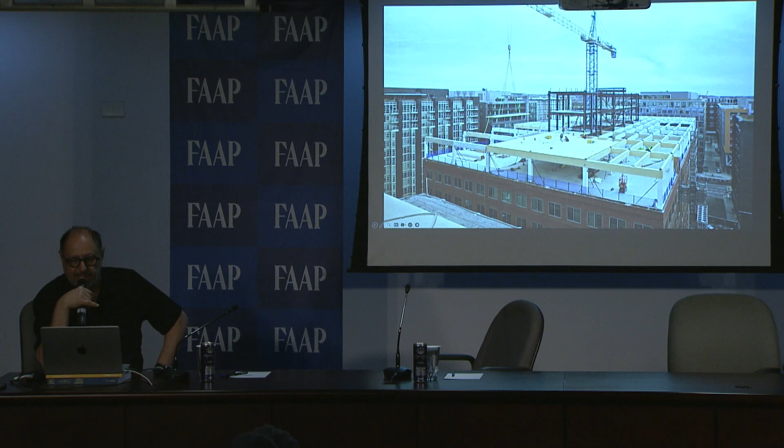I think many other people said this, we have to reuse more of our buildings. This is a 7-story concrete building in Washington, D.C. It's the first vertical expansion using mass timber in the United States. So again, we're adding 3 stories of mass timber on a 7-story concrete structure. And we were, in this case, specialty engineers. We only designed the timber. But with this approach, the client was able to add 3 floors with very minimal reinforcing of the existing concrete structures. There's a view of the remodeled entrance.

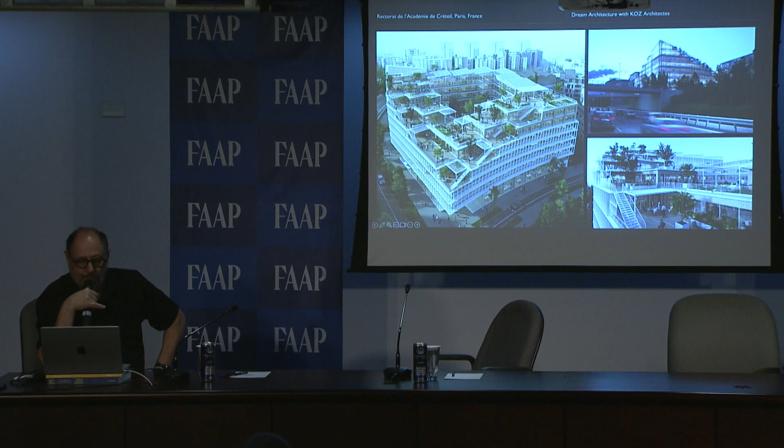And then one of my last projects, this one in Paris. This is the first project that we did in France. We won a competition with KOZ and Dream. This is the Rectorat de Créteil, so it's an office building for a regional school board. 9 stories of mass timber with 1.5 floors of concrete. The building is basically a building that wraps around an interior courtyard.

Now, my thinking here was that the economics of mass timber in France are different than the economics of mass timber in North America. In North America, first of all, we now have quite a few CLT suppliers, and CLT is about half the price of glue laminated timber. In France, it's not quite the reverse, but CLT is comparatively more expensive than it is in North America.

So the approach was to use very closely spaced purlins at 1.35 meters, and then to use the thinnest possible wood deck that we could use. So we ended up with a 2.7 centimeter 3-ply CLT. It's a product that comes from Austria, typically called Dreischichtplatte. That was the approach. And this was the sketch that I did by hand. I'm a dinosaur, so I still draw everything by hand.

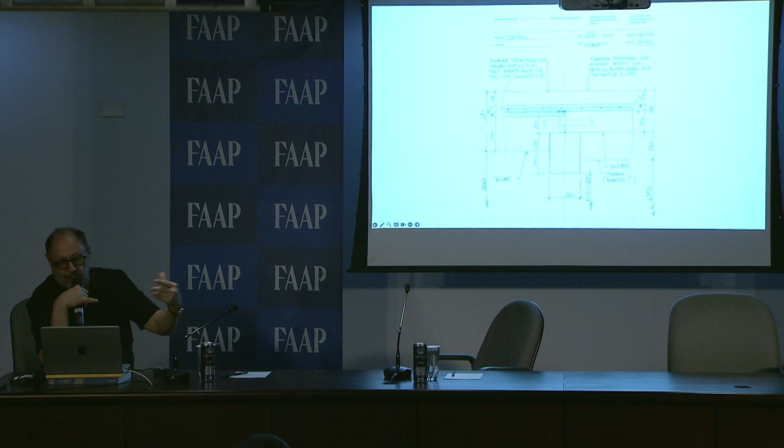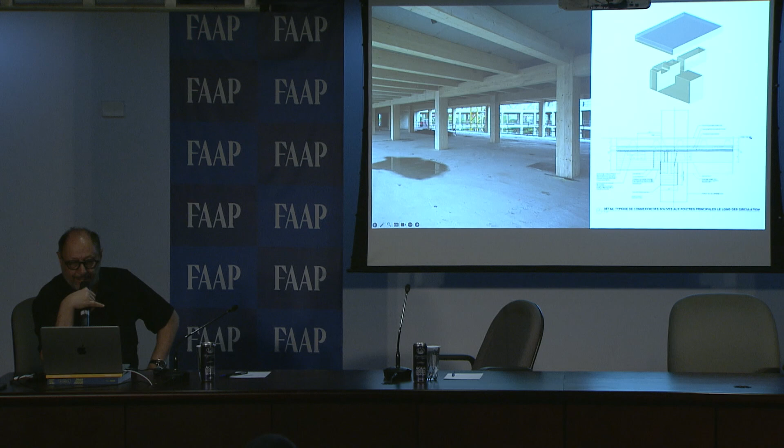So the idea was, again, similar to Google, to have deeper beams on the outside of the building, and then in the corridor, where the span is smaller, to have shorter beams and to elevate the beams above the girders to allow us to bring all the services through the corridor and then into the office spaces to the side. The final detail actually ended up being exactly the same. The only difference being that the supplier replaced the Dreischichtplatte, which was an imported material, with 5 centimeter concrete panels, to save some money.

So this is our corridor with the shallower beams, it's the services highway, where all the services come down and then branch to the left and to the right into the office spaces. And we also pre-cut some openings in the beams in the factory.

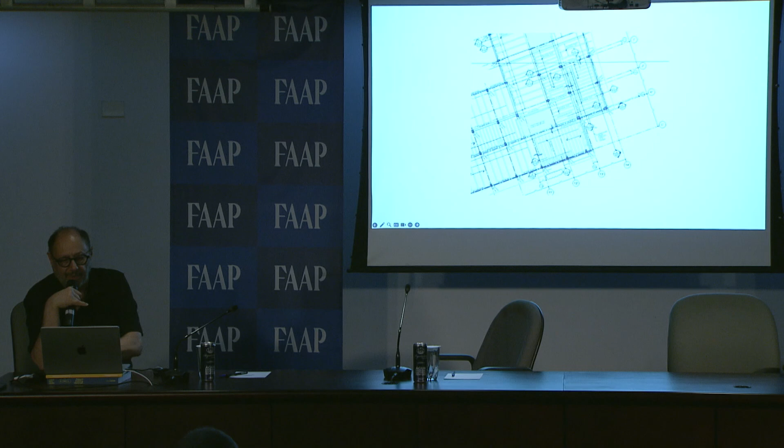We made all the cuts the same to allow for some of the services to also travel within the office spaces where required. And of course, those cuts are reinforced with screws. At the terraces, there are quite a lot of terraces at one corner of the building. We had to reduce the spacing of the beams in half.

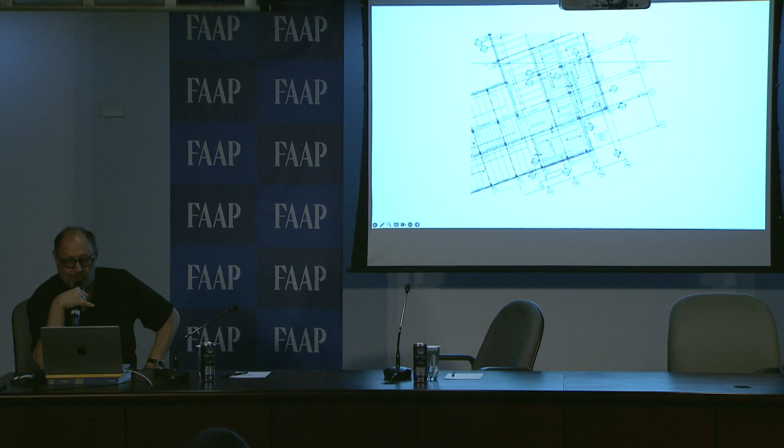Because we go from the inside to the outside, we have to step down quite a bit. But we had to keep the same elevation at the underside of the beam. We had to go to a wood concrete composite solution. So the majority of the structure is just regular post and beam with a deck. At the terraces, we had to go wood concrete composite to keep the same underside of beam elevation.

So here you see the composite system that the supplier chose. It's a big steel dowel that they were all installed in the shop. There's a view of the terraces during construction, and a view of some of the spaces again once the structure was completed and everything was cleaned out.

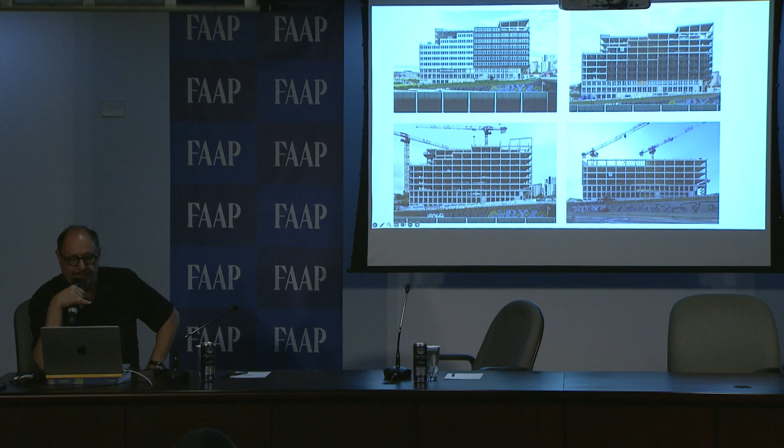So a few stages during construction, just the structure and then some of the facade going on. The project is actually still under construction. It will be completed in a few months, 2 or 3 months. So there's a view of some of the facade finishes, a combination of wood and metal. And then in the interior courtyard, a wood facade everywhere.

So I'm going to wrap up with some comments about the future of wood in construction. 125 years ago, we used 20% mineral materials in construction and 80% bio-based materials. In 1950, we went to half and half, and now we're only using about 15% bio-based materials in our construction.

And to be able to be net zero by 2050, as the plan seems to be, we're going to have to go from 15% to 60% bio-based material, which is, in my view, an incredibly difficult task. Now, we're making progress, but I think the progress that we have to make has to be not so incremental, but really in massive steps. And as we were discussing things amongst ourselves over the last week, I came to a number of conclusions.

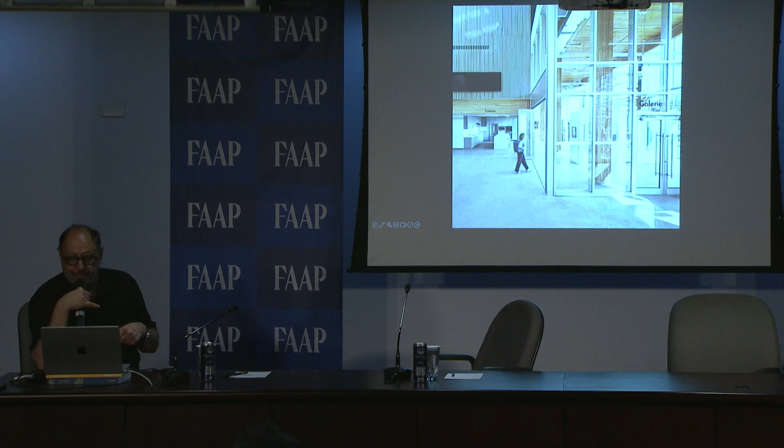So, that's repeating this picture. So we're making progress code-wise. There's a lot of progress happening in the US as well. But we have to keep the momentum of innovation. We have to speed up how quickly we increase the amount of wood that we use in buildings if we want to meet that target of 60% in 2050. Obrigado.

Thank you, Eric. Thank you for the excellence of your work.